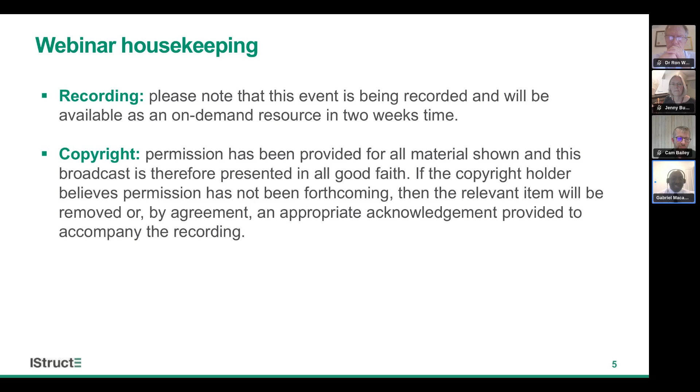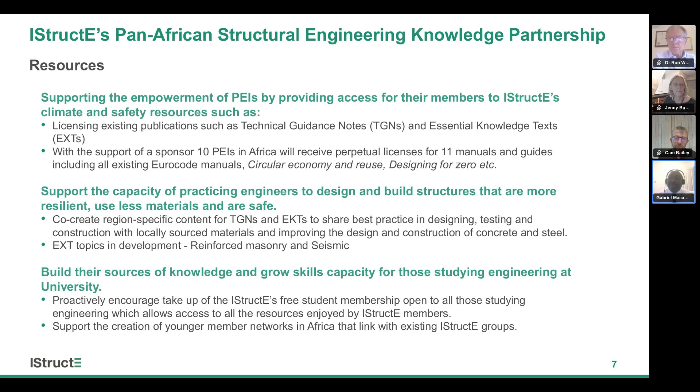So quickly, what's behind the discussion we're having today is IStructE's Pan-African Structural Engineering Knowledge Partnership. In the words of Yasmin, the CEO of the institution, IStructE's vision is to ensure that structures built around the world are safe, resilient, and sustainable. In that light it becomes important for the institution to collaborate with international partners, and that is being done through partnership with the Commonwealth Engineers Council. For the pilot stage of this partnership, 10 African professional engineering institutions have been selected. For details of the partnership, access to resources the selected institutions will enjoy, and for student or affiliate membership, I'd encourage you to go to the resource section under the overview to access this information. If you have further questions, send an email to the institution through the email on screen, or for information about student membership, email education@istruct.org.

Now to the big topic of the day, which is applying the principle of lean concrete design. Why do we need this? It's known that new build construction output globally on a weekly basis is equal to the size of the city of Paris. From IStructE's publication, on the right-hand side of the screen, we have the value for the CO2 equivalence of 1 cubic meter of structural concrete. At the bottom left we have the estimated infrastructure concrete volume, around 50 to 100 million cubic meters - that's the extent of new build we have weekly. I did a quick approximate carbon estimate using the lower band of 50 million cubic meters: if all engineers and players in the construction field could target a 10% reduction in concrete volume across all our designs...

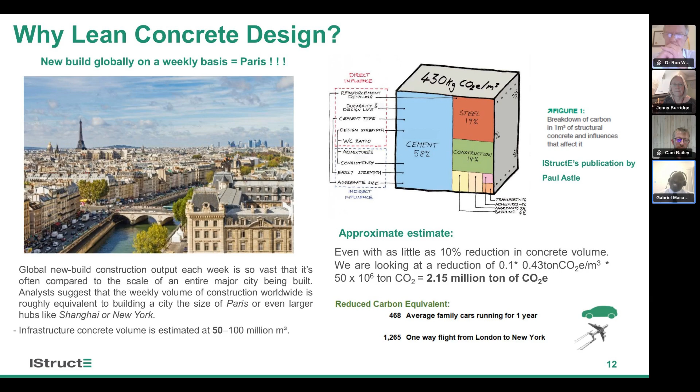Thanks, Gabriel. So in my presentation, I'm going to start by giving a short introduction to basic concrete construction. I'll then look at the range of concrete frame options, and then I'll move on to what we can do to improve the material efficiency of our structures. And I'll finish by giving a worked example.

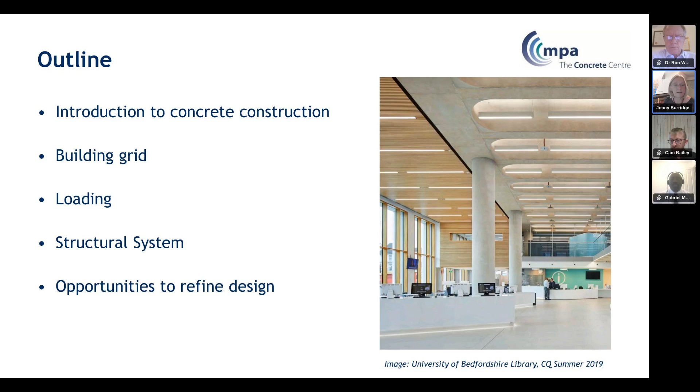With concrete, there's a range of concrete construction approaches available. In situ construction, which is the common one, is where concrete is poured on site in the position in which it will be used, using formwork as the mold. It has inherent robustness and allows modifications on site, but it is generally slower.

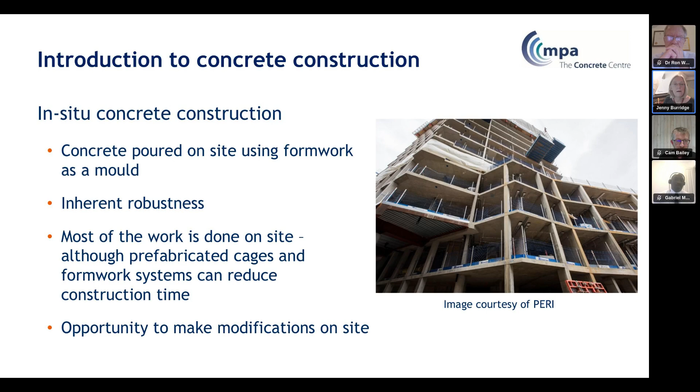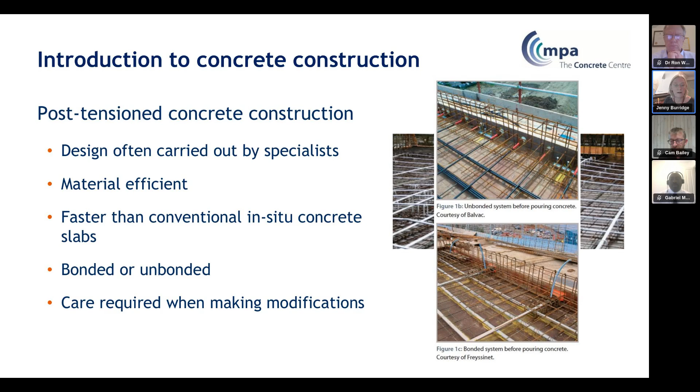Post-tension concrete is a method of adding pre-compression into concrete after it's been cast. This pre-compression significantly reduces the tension steel required and enables the concrete to work more efficiently, saving up to 20% of the concrete and 50% of the steel.

Precast concrete is concrete which is formed off-site, typically in factory conditions, and brought to site for assembly. Elements can be either standard, proprietary components, or bespoke elements designed to suit a particular project or application. It is typically very fast on site, but precast concrete elements should be repetitive so that it enables molds to be used again and again, minimizing cost and waste, which is important.

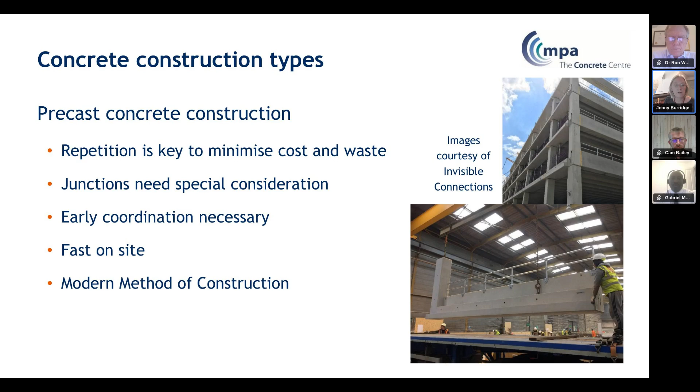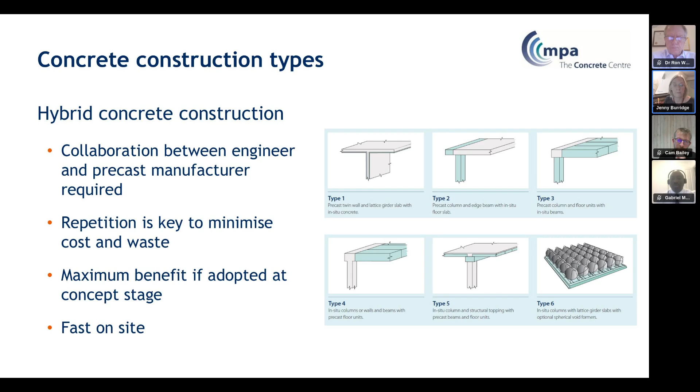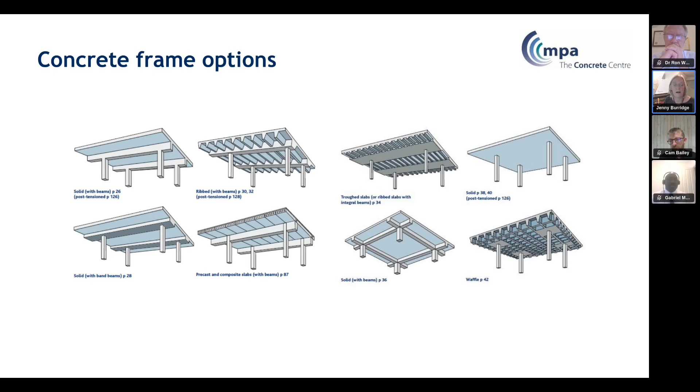Hybrid concrete construction uses precast and in situ together, combining them to give a robust, durable construction system with reduced time on site. As you can see from this picture, there are lots of concrete frame options depending on the type of concrete construction you are using. I'm going to talk about floor slabs in particular, because that's where an awful lot of the material is if you're looking at a building.

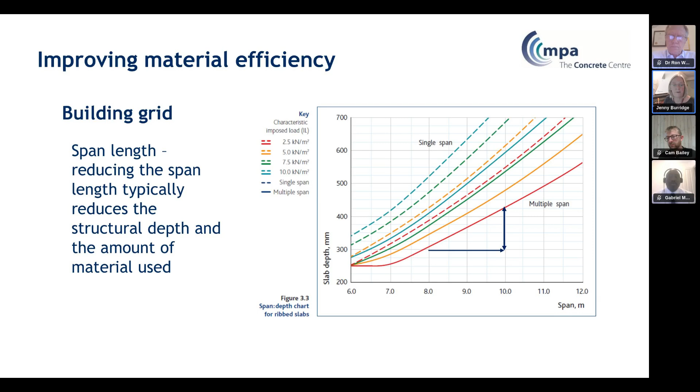However, we don't see this trend everywhere. In shorter spans, the structural depth is often governed by practical construction limits. When it comes to proposing shorter span lengths, this may go against client or design team aspirations for flexible, relatively column-free spaces, particularly in open plan offices. However, it's acknowledged that this can lead to carbon-intensive structures, and it's worth pushing back on having very long grids.

It's not just the span length that impacts material efficiency. The layout can also have a big impact. The aspect ratio of the bay, for example, how square or rectangular it is, is an important consideration. Square bays are typically more efficient for two-way spanning slabs, whereas rectangular bays are generally more efficient for one-way spanning systems. By selecting a regular layout, we can increase repetition, which can speed up the construction and allow for reuse of formwork, reducing wastage of formwork on site.

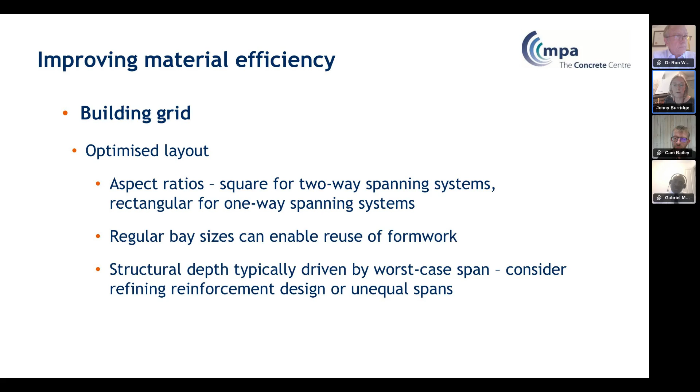Structural depths are typically driven by the worst case span, and typically the worst case span is at the end span in a continuous structure. To improve material efficiency, you may want to consider reducing the spans at the end bay or introducing a cantilever at the slab edge, both of which will give you more efficient structures.

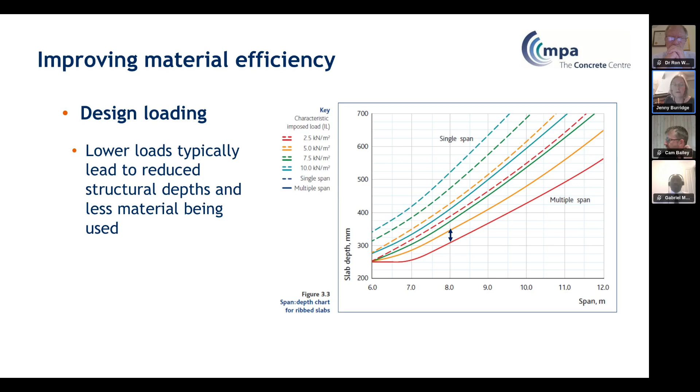If we return to the graph we saw earlier, we can see that the load on the structure also impacts the structural depth and material efficiency. For an 8 meter span, if we reduce the imposed load from 5 kilonewtons per square meter to 2.5 kilonewtons per square meter, we reduce the slab depth by about 50 millimeters. The loads on structures are determined from a number of sources, such as client requirements, codes and standards, experience and industry guidance. So it is important to consider where there are opportunities to refine them.

With these images from the MEICON project, which were published in the Structural Engineer a few years ago, these are really helpful for understanding and visualizing what the different imposed loads mean.

One of the concerns with reducing the design imposed loading is that it may limit future flexibility should a project be used for something else. The decision to allow for future flexibility should be made on a project-by-project basis, but where possible, we should avoid over-designing structures and consider strengthening it if a greater capacity is required in future.

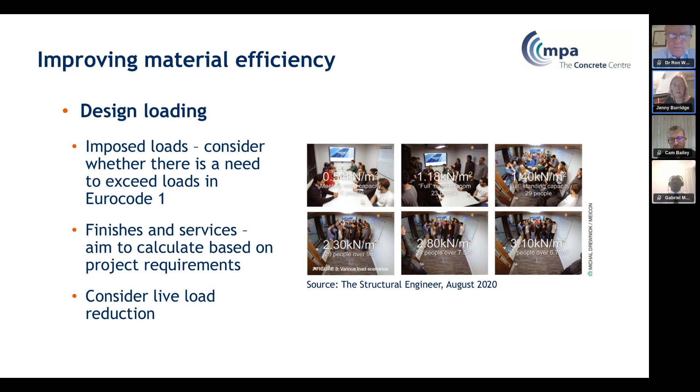For imposed loads, designers should also consider using live load reductions for buildings over 3 stories, as this can lead to material savings in the vertical structure and the foundations.

We saw earlier that there is a wide range of framing options available, and identifying the best framing solution for each case depends on a number of factors.

Typically, deeper systems, such as rib slabs or slabs on beams, are more material efficient than shallow systems, such as flat slabs. Beams can be used to support large point loads, and flat slabs are more appropriate for regular column grids, and they're not suitable for large point loads.

Structural systems that incorporate voids, such as ribs and waffle slabs or precast hollow slabs, minimize the use of concrete where it's not required. Post-tensioning should be considered wherever long spans are required, that's about over 7.5 to 8 meters. Post-tensioning should be considered wherever possible, in other words. Hollow core planks typically use pre-stressing, so they've got pre-compression and they are material efficient.

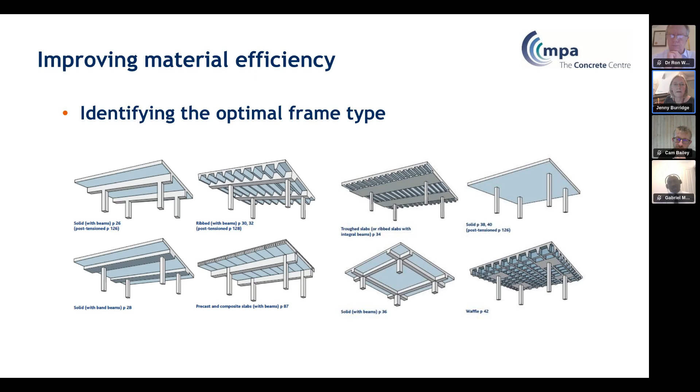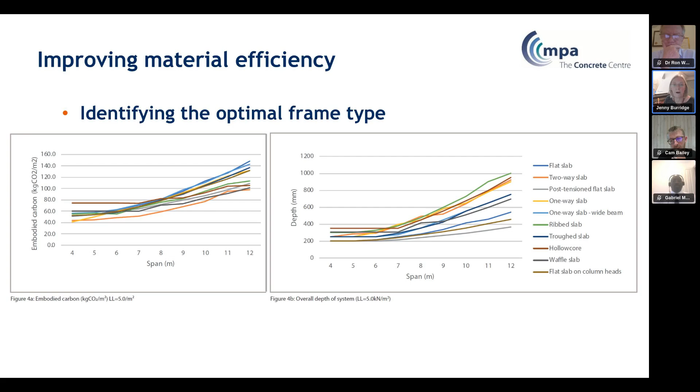Whilst factors such as span, loading, and structural floor systems can have potential to make material savings across the frame, the opportunities to improve structural material efficiency as part of element design should not be overlooked.

It is common for designers to group elements such as beams and only design for the worst case. This is then used for the element size and reinforcement for a whole group of elements. This rationalization is often used, but does lead to use of significantly more material than is actually required.

Designers need to find a balance between enabling design and construction to be efficient and accurate, and avoiding unnecessary material use.

Engineers should also consider opportunities presented in the design codes for refining designs, such as detailed calculation methods for deflection, which may enable a shallower beam or reduction in the reinforcement, or the calculation of lap lengths and anchorage lengths should be based on the actual bar forces, not on standard tables. That allows you to reduce the reinforcement quantities.

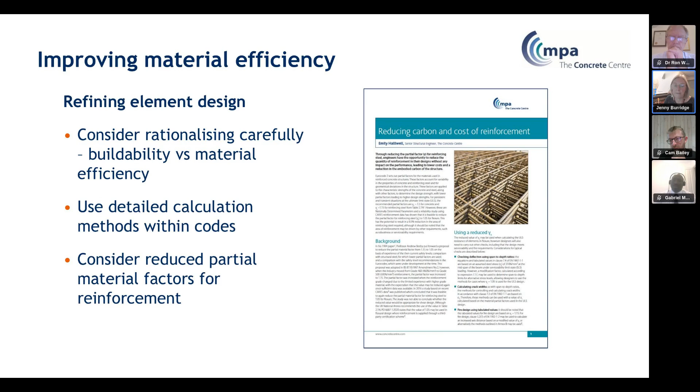You might consider looking at partial safety factors when using the design. We did a study using UK CARES reinforcement data, which showed that it is feasible in this case to reduce the partial safety factor of reinforcing steel from the recommended value of 1.15 in Eurocode to 1.05. This is for bending. This potentially reduces the area of steel required by 9.5%, although it may be affected by other demands such as robustness or serviceability.

When selecting our framing option, we need to think beyond the frame itself and its wider impact on the building design. The structural design can lead to other opportunities to reduce program, cost, and carbon, and these are important to consider as part of the decision-making process.

Some of the key opportunities are reducing the floor depth, which can make the overall building shorter, and this can then lead to a reduction in the height of the cladding required and the cost and carbon associated with that.

The design of foundations is highly dependent on soil type, ground conditions, and site constraints. However, reductions in foundation loading will enable cost and material savings to be made in the substructure design.

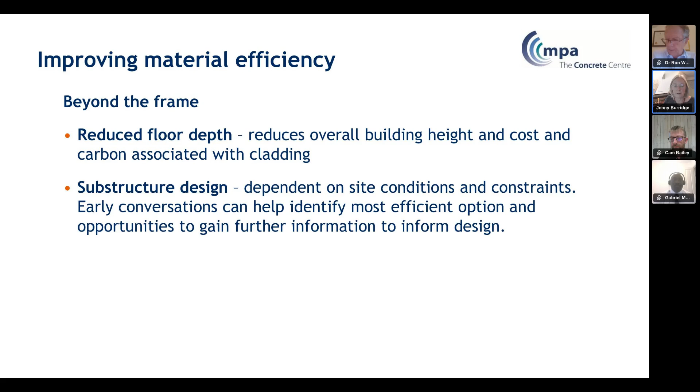In schemes such as where a flat soffit is provided, the installation of partitions may be simplified. For example, there's no need for cutouts around downstand beams, which can avoid wasting partition materials. Additionally, flat soffits can allow for more efficient services routes, as there is no need to route around downstands. These shorter routes can lead to less ducting and other materials being required.

Where soffits are exposed, we can use the thermal mass of the structure to reduce operational carbon. This is even more efficient for options such as ribbed and waffle slabs, which have greater surface area.

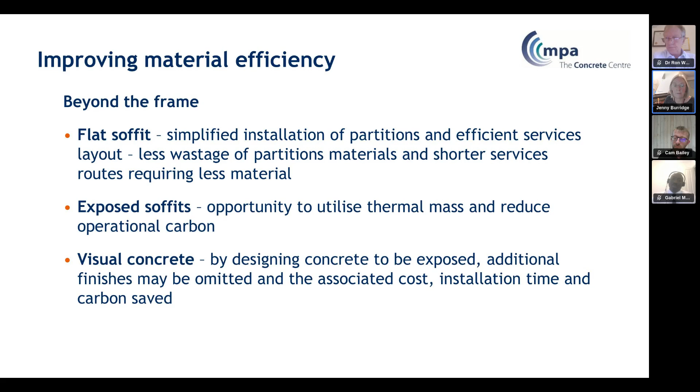Finally, through exposing concrete within the building, we can reduce or remove additional finishes such as ceilings and the cost, carbon, and installation time associated with them.

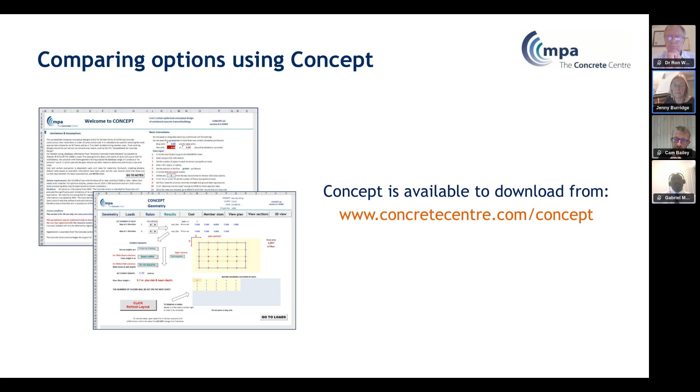I'd like to take you briefly through a worked example now to see how incremental changes can make a significant difference to the material efficiency of a project.

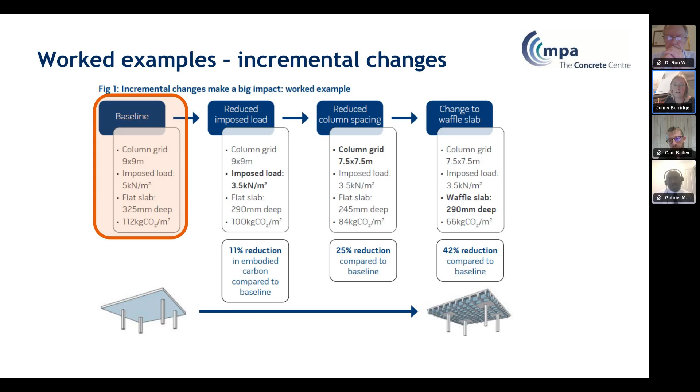The baseline for this example is an office building with a 9 by 9 meter grid and imposed load of 5 kilonewtons per square meter. It's a flat slab with a depth of 325 millimeters and has an embodied carbon of 112 kilograms of CO2 per square meter. We've used a typical concrete mix for this example, and the concrete itself is the same in each of these options, so the savings in carbon are just from the changes to the structural system.

Further savings can be made by changing the concrete mix. The first step is to reduce the imposed load. The recommended imposed load for offices in Eurocode is 2.5 kilonewtons per square meter, plus 1 kilonewton per square meter for partitions. If we reduce the imposed load to 3.5 kilonewtons per square meter to align with this, the slab depth may be reduced to 290 millimeters, leading to an embodied carbon reduction of 11%.

The second step is to reduce the column spacing from 9 meters to 7.5 meters, keeping the footprint of the building the same. In combination with the reduced imposed load, this results in a 25% reduction in embodied carbon compared to the baseline scheme. The final step is to change the structural floor type to a waffle slab. The combined changes in column spacing and loading mean that the proposed waffle slab solution is in fact 290 millimeters deep, compared to 325 millimeters for the flat slab in the baseline scheme. There's an embodied carbon reduction of 42%.

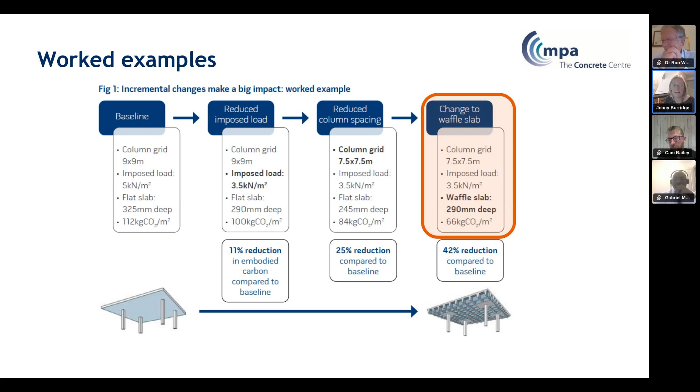To conclude, we looked at the range of concrete construction types available to help identify the approach that suits your particular client, project or site. We then looked at a wide range of concrete frame options and the benefits of each of these. Optimizing the design criteria will help improve material efficiencies, and there are resources, including Concept, to assist with comparing these options. So that's it from me.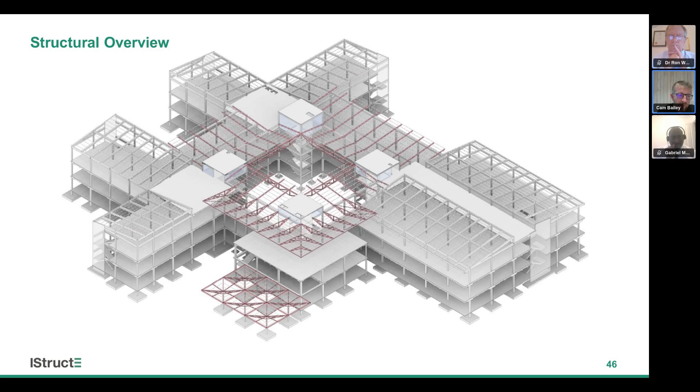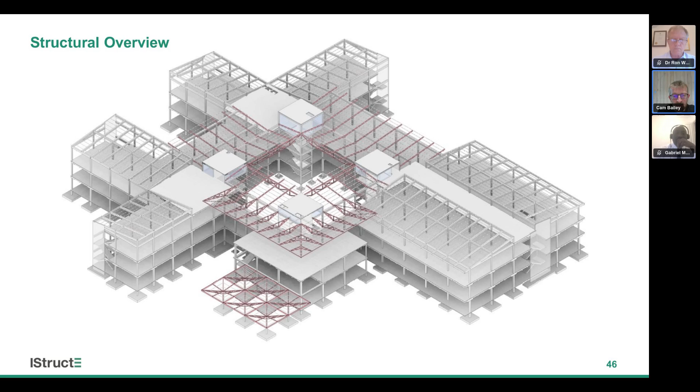In situ reinforced concrete is the main building material in Angola, so we adopted this to form the primary structure, but combined it with a steel roof to achieve the large overhanging canopies above the entrance and the central courtyard. To accommodate the medical program, we adopted an 8-meter structural bay throughout at an early stage, and the building is founded on shallow pad footings.

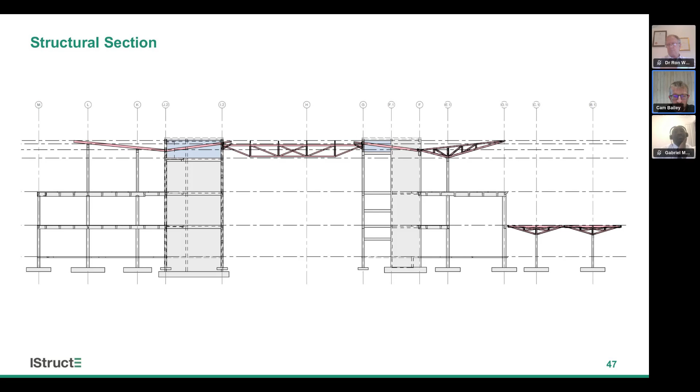We had a number of different conditions in section. Here you can see the stepped profile of the building, 2 of the central cores, the long span steel truss over the courtyard, the cantilevering truss canopy over the atrium at the entrance, and just a quick diagram showing vertical load paths here.

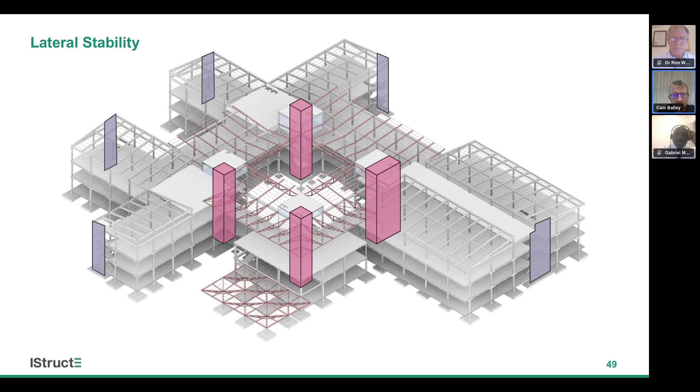With a large building footprint like this, an efficient lateral stability system was important. We centered primary cores around the central circulation space of the courtyard, then introduced independent shear walls at the extremities of each wing. This approach avoided the need for moment frame systems through the beams and columns, which can drastically increase concrete and reinforcement quantities. This freed up the columns and slabs to be designed as efficiently as possible.

So now I'll talk specifically about the waffle slab system and the lean design approach we took. To achieve the 8-meter bay size, we proposed a 2-way spanning waffle slab system with drop panels above columns to resist punching shear. The waffle slab molds available in Angola are typically 800 by 800, which fit with the 8-meter by 8-meter bay size. They're often imported from Portugal or China, and they're removable, reusable, and use a proprietary propping system.

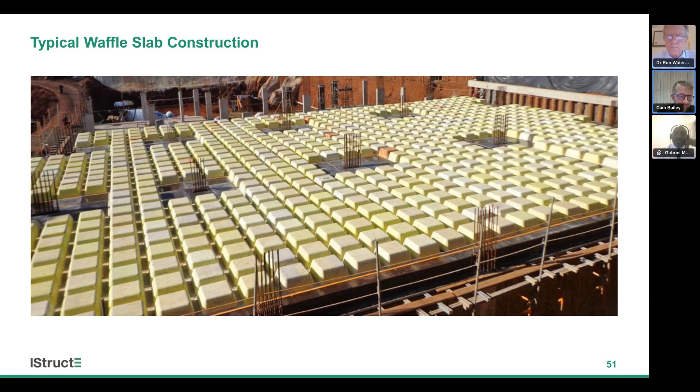However, we found that fire resistance requirements were driving the dimensions of the waffle slab rather than the structural capacity. Healthcare facilities often need 60, 90, or even 120-minute fire resistance, but we were at the lower end of this due to the building only being 3 stories.

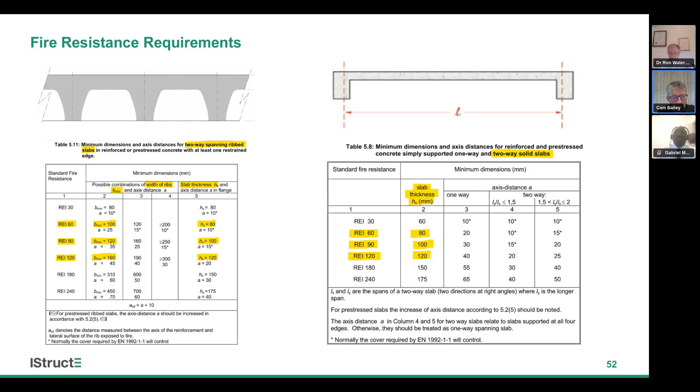According to Eurocode 2, Part 1.2, whether you are designing a waffle slab or a solid slab, to achieve a 60-minute fire rating, the slab must be at least 80 mil thick. The ribs of any waffle slab must also be a minimum of 100 mil wide, no matter the span.

So we decided to explore what it meant to push these minimum dimensions for fire, particularly the slab thickness, towards the structural capacity. An 80 mil thick slab can easily span 1.2 meters square, even with a relatively high imposed load. A 100 mil thick slab can easily span a 2 meter by 2 meter bay.

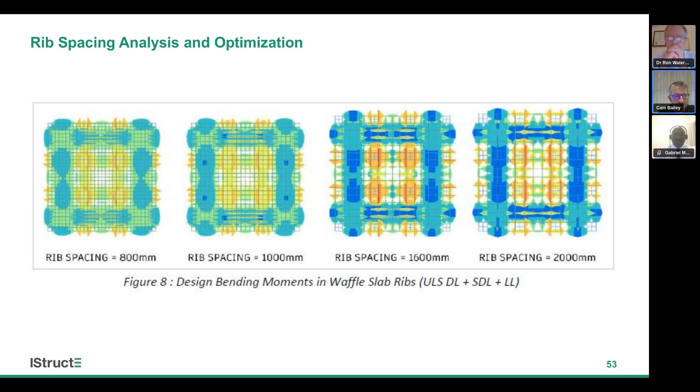So we analyzed various rib spacings, which were divisions of the 8 meter typical structural bay, including 0.8 meters, 1 meter, 1.6 meters, and 2 meters. We carried out structural sizing exercises for each case.

The 0.8 meter rib spacing required a 450 mm deep rib with 80 mm thick slab. And at the other end of the scale, the 2 meter rib spacing required a 525 mm deep rib and 100 mm thick slab.

After calculating the resulting material quantities at the schematic design stage, we could demonstrate that adopting a 2 meter rib spacing rather than the standard 0.8 meter could lead to a 25% reduction in concrete volume and a 30% reduction in total reinforcement.

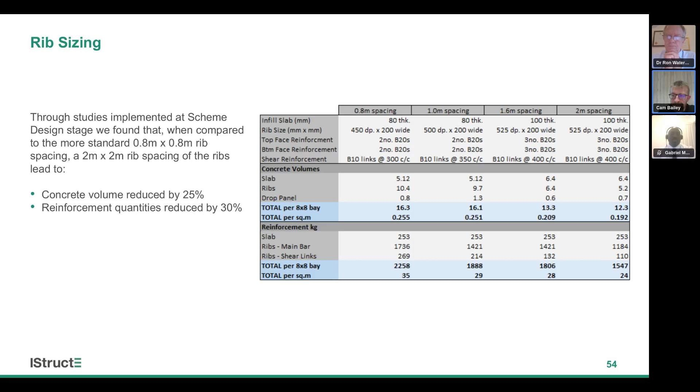Of course, we had to acknowledge that this would be a non-standard system and that special molds would need to be fabricated and shipped to Angola. However, it's worth noting that wider rib spacing is not a new or revolutionary concept. This type of construction has been used elsewhere, and there are manufacturers who are used to supplying this type of formwork.

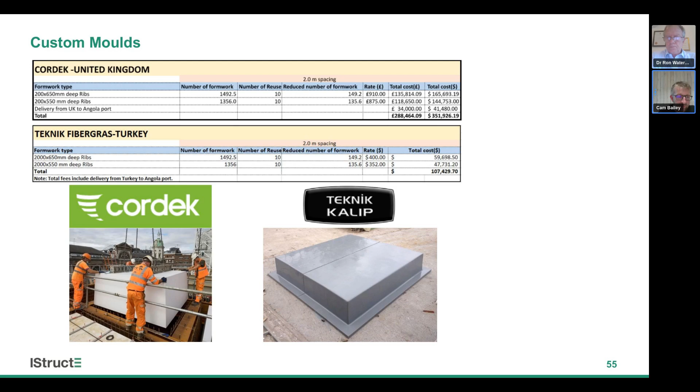We received quotes from Cordek in the UK and Teknik Kalip in Turkey, both providing molds that could allow 10 or more reuses. Cordek proposed an expanded foam material, which was more expensive and bulkier for shipment, and so we opted towards the Teknik Kalip product, who proposed reinforced polymer, more similar to the readily available molds in Angola. These were more cost-effective and could be stacked for better shipment.

We updated our numbers through the design development stage. You can see here that at the top of the table, the rib sizes increased in both cases due to a more detailed analysis having been completed, including more rigorous deflection and resonance checks.

Cost analysis included amounts for formwork and waffle molds established through direct quotations, as you saw, and with the QS on the project. We found that the 2 meter rib spacing led to a roughly 10% cost saving from the standard waffle system and a 30% reduction in embodied carbon due to lower material quantities.

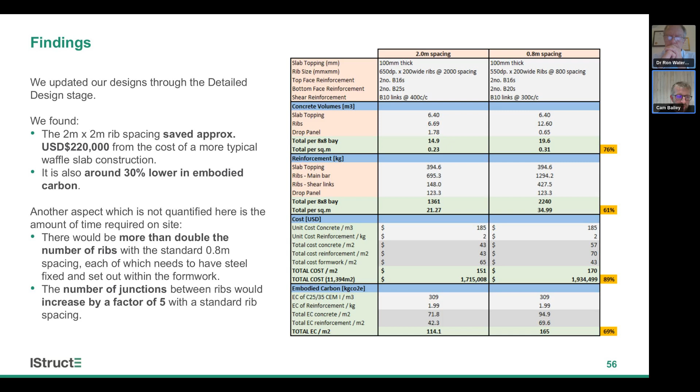We also believe that the time on site would be significantly reduced, with less rebar fixing and many less fiddly junctions between the ribs. And then a final consideration is the effect of this on the weight of the building.

Due to the reduced material quantities, the total load on each floor level obviously reduced as well, by an average of around 13%. For areas with lower imposed load or lower partition loading, this percentage reduction was higher.

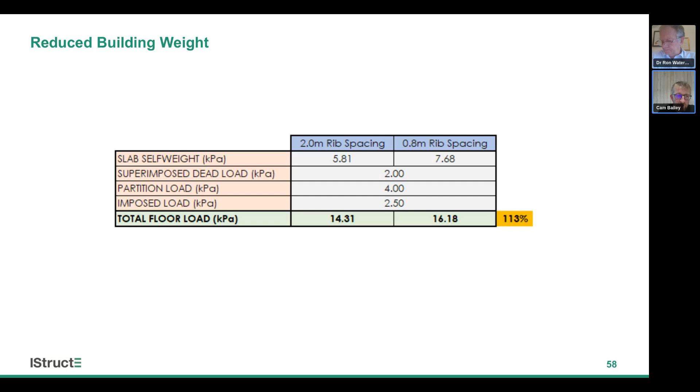This has a knock-on effect on the size of the pad foundations. In areas with a steel roof, we demonstrated potential foundation area reduction by around 15%. And in areas where we had 3 levels of the waffle slab construction, such as below service roof areas, the reduction is more like 19 or 20%.

In reality, given the 300 kPa bearing pressure we had on site, this meant reducing these larger pads from 3.5 meters square to 3.1 meters square. Assuming these are 0.6 meters deep in both cases, this would save around 1.6 cubic meters of concrete per pad.

And with a building with such a large footprint and so many columns, the total additional material cost and carbon saving potential is very significant. Unfortunately, despite the evidence, the contractor on this project decided to stick with what they knew and use the standard off-the-shelf waffle slab system with the 0.8 meter rib spacing.

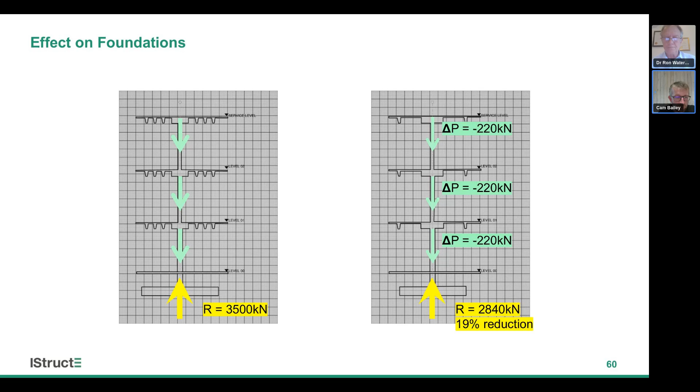And so on that note, I will hand over to Ron, who hopefully will talk us through some of that.

Thank you. Thank you. I've been asked to talk about influencing clients and contractors to achieve lean design.

I think let's just start off with the fundamentals of project delivery, how we deliver, because at the end of the day, it's a buying and a selling process. A client wants something and a contractor and designers will provide it.

So if you look at the starting point, you're going to have a client value proposition, or the promise of measurable benefits resulting from the project. And if you go to the finish line, you're going to have project value, which is the outcome of client decision-making to achieve an optimal balance of project benefits, risks, and costs.

So to get from the start to the finish, you're going to have a client value proposition, which is going to reflect the client values, satisfy a business case, the budget, time for completion, scope, and then very importantly, one is going to have to procure resources to deliver the projects, go through your project activities, land up with your end product and all the sustainability impacts.

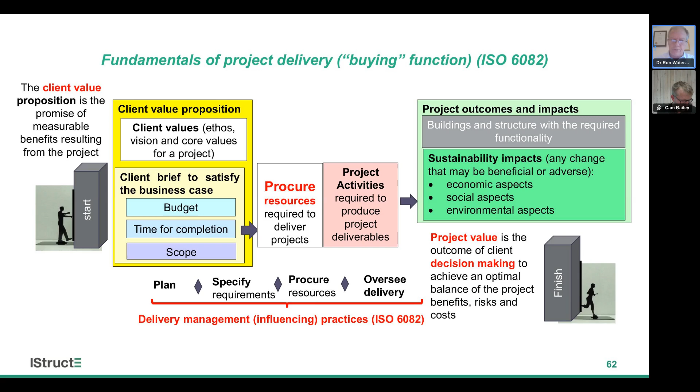And through that process, the client needs to perform a delivery management function, which is really the influencing practices, because their fundamental role is to plan, specify requirements, procure resources, and oversee delivery. So in this process, what the key issue is, if we're looking at lean construction and we want to maximize value and minimize waste.

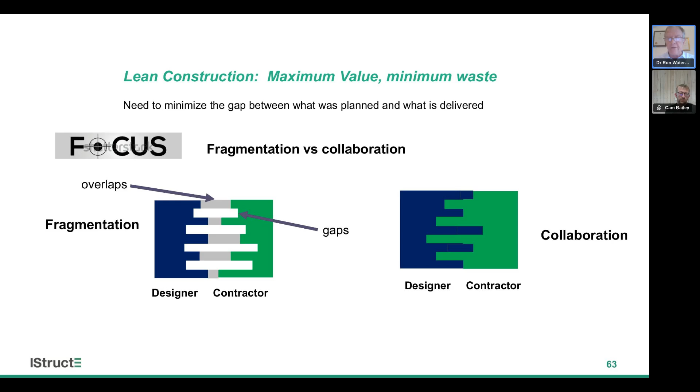I think some of the two previous speakers were talking very much about that, we need to minimize the gap between what was planned and what was delivered. And there's a very good example that Cam gave of you design something and contractor decides he's going to do it some other way. So really the focus is we want to get rid of fragmentation where we have them and us, or a separation between design and contractor, and we want to move the two together to work collaboratively.

Now, a paper that struck me many years ago in my journey through a lot of these things is Lichtig indicated in 2006 that to provide higher value and less waste, the fragmentation in design needs to be addressed, and he spoke about preferably before 25% of the design is complete.

So we need to think about this, how to get contractors involved in construction at an earlier stage and participate in the design process. So we've come across the concept of early contractor involvement, where what you want to have is the principal contractor engaged at an early stage to offer input into the design process, to get buildability, to get design, and to optimize value, minimize waste.

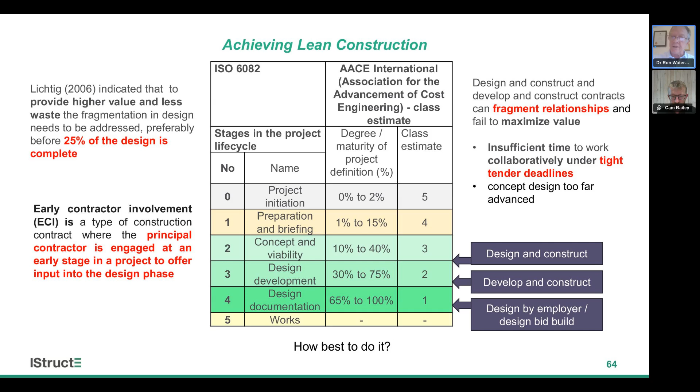But what does tend to happen is that even though they try and reduce the fragmentation in relationships, sometimes in the tendering conditions, there's just insufficient time to work collaboratively under tight deadlines, and the concept design is too far developed to reverse it to get something better. So we've got to think about trying to do things in a different way.

So there is the concept of early contractor involvement, which I will take you through. That's part of the NEC Engineering and Construction contract. They have an option for it. And the idea of that is that you would, after you've done your briefing or your strategic brief for your design, to take your project forward, your contractor would be appointed at the same time that your designers start working on it.

And so you split the activities into stage 1 and stage 2, where stage 1, you'll go through all the design process. When you've got what you're going to build and you're going to enter into your construction phase, the client would then instruct construction. So you would move through all the way through the stage 1 and stage 2.

Stage 1 would typically be on a cost reimbursable basis. Stage 2, you can do on a target cost basis. For those of you that are not familiar with target costs, because the problem is if you're paying on a cost reimbursable basis, there's no control on productivity. So the idea of it is that you would set a target at the outset. You'd pay the contractor his cost uplifted by his profit and overheads.

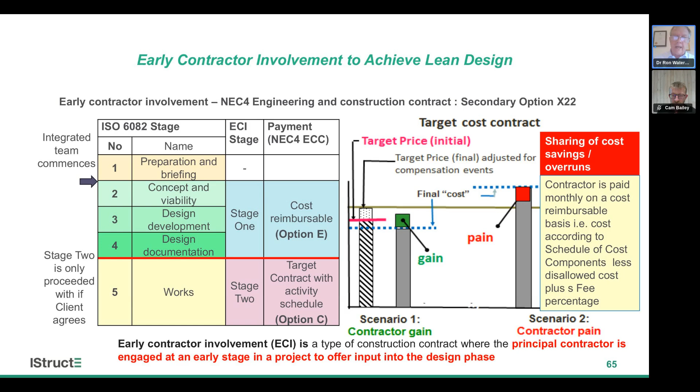When you come to completion, you will see whether you are above or below the target with costs. What you would do is share the pain and gain, so there's an incentive for both the client and the contractor to work within the budgets that are put together. This is one method of providing an opportunity to engage a contractor earlier to get lean construction going.

Another way of doing it is something I've been involved with for a number of years in South Africa, where we've developed framework agreements in a single stage approach. In other words, you have all the terms agreed in the contract, and you then call off orders. So an order read with the standard terms in the framework contract would then create the contract that you can move forward with.

You'd have a start date and an end date, typically a 3 to 4 year period, and the rules of the game are you may issue as many orders as you want from the start to the finish of the term. Anything started before the term ends you will finish, and then the contract comes to an end, but you don't instruct after that.

So what this does is allow you to achieve the appointment of a contractor while the design work is done, even if you have a separate contract for the design work with no design responsibilities for the contractor, if that's the way you want to do it.

So with this, it allows repeat relationships to work. If you're working across something like a university campus, schools, or anything else like this, you can start off with a first order and work with the same team order to order to order, so you can improve your techniques and ways of trying to get better performance.

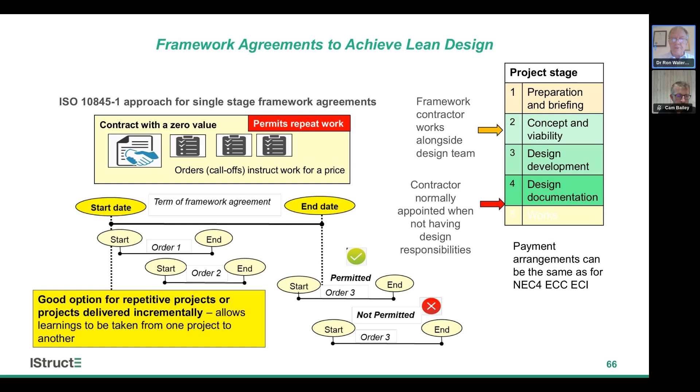If we then look at trying to bring this to an end, let me put forward some remarks and observations, because I've only had time to introduce you to some of the concepts.

I think that lean design will only be realized when designers and contractors collaborate, and that is where you're going to get the best results. That is where early contractor involvement is essential. Remember that procurement is, after all, a buying and selling process, and if we can get that right with the right objectives, we will be able to deliver.

But some of the things we need to think about in trying to influence change: I really believe clients will only change their approach to procurement when they are dissatisfied with the project value they realize. I think we've got to start publicizing some of the bad projects where value hasn't been realized, to encourage people to achieve good value and publish those as well.

We also need contractors and consultants to demonstrate the benefits of early contractor involvement to realize better value. A culture change is necessary, and cost-based pricing strategies need to be embraced rather than avoided.

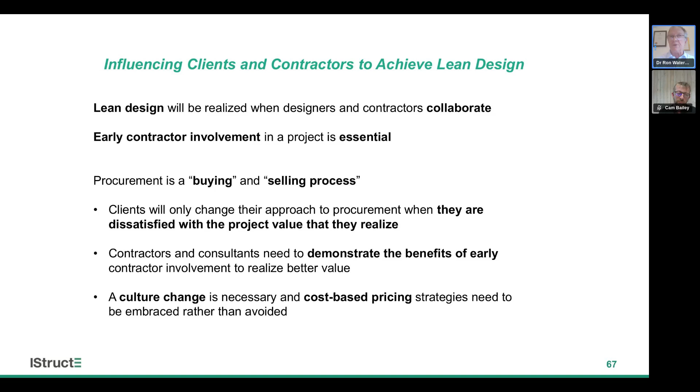Particularly in the UK, there's a lot of use of the NEC, with a lot of design involvement with contractors. In Africa, we've been very influenced by price-based contracting strategies, and we need to start thinking about getting to cost-based strategies to achieve what we need to achieve.

So I will then hand over for the concluding remarks from the chair.